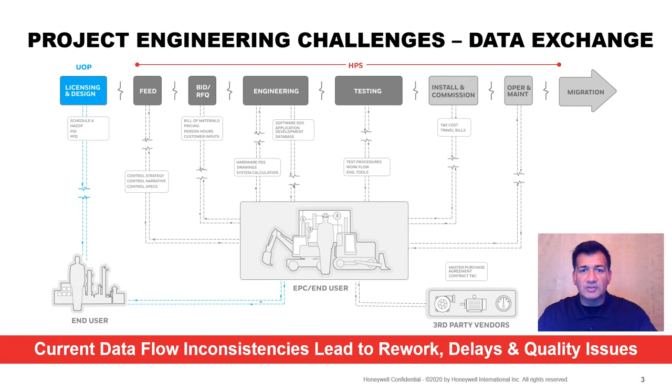Honeywell has begun to solve these current challenges by digitally transforming our project implementation processes across all project phases: front-end engineering design, implementation, and testing.

We have a cloud-based environment called the Honeywell Virtual Engineering Platform, or HVEP 4.0. This cloud hosts our project data and has our standard builds, checklists, solution packs, and tools seamlessly integrated.

This allows the same data to be used by all project stakeholders from the start to the final deliverable, which significantly improves quality and overall productivity.

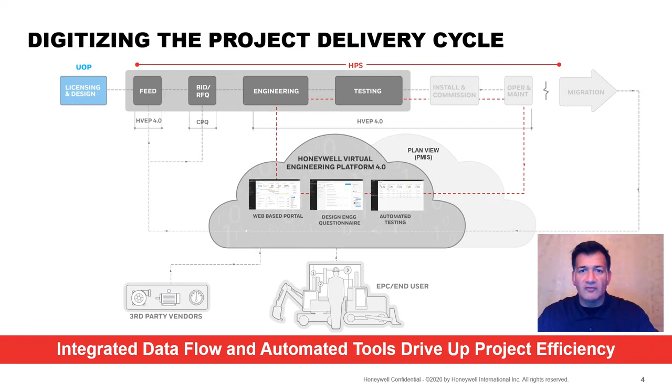The Honeywell Virtual Engineering Platform 4.0 digitizes the project engineering processes with a secure, centrally hosted cloud environment. It enables project team members to collaborate on a remote basis using cloud dashboards for transparency and a view of all the project status and deliverables.

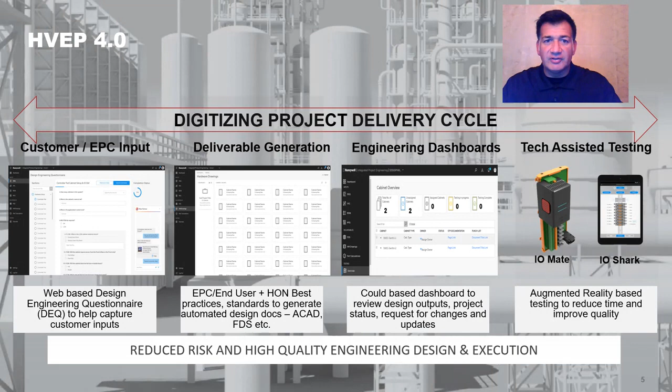The first area you want to look at is called the Design Engineering Questionnaire, which has built into it our proven designs and Honeywell best practices.

What we have done is digitized our project design checklist and questionnaire, which allows us to capture standardized inputs from multiple sources in a consistent manner. The assembly of these inputs, associated and aligned with standard build content, then allows for the deliverables, such as the functional design specification, to be generated.

These deliverables can be generated with the click of a button. I have a short video to demonstrate this.

Once we have completed a sufficient portion of the DEQ, we are then able to generate deliverables, which could be in the form of a functional design spec, hardware drawing, or test reports. What we've done is taken standard project tools, for example those used to support drawing generation.

They are connected to the project source inputs, which allows auto generation capability of our hardware drawings. I will demonstrate this with a short video.

What I'm showing now is a video that will give you a conceptual understanding of the Design Engineering Questionnaire. On the left-hand side of the main menu, you see the inputs, then the deliverables, and then the testing criteria.

This particular questionnaire is used to complete the requirements for a safety system SC cabinet design, where we've tried to maximize these standard options.

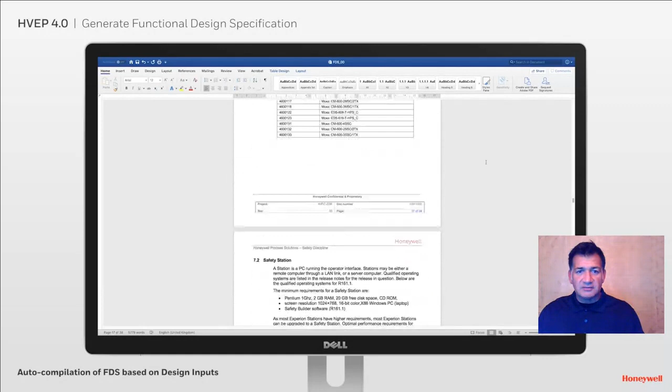That helps us maintain alignment with revisions to documents. So what you see here is our standard functional design specification for a safety system.

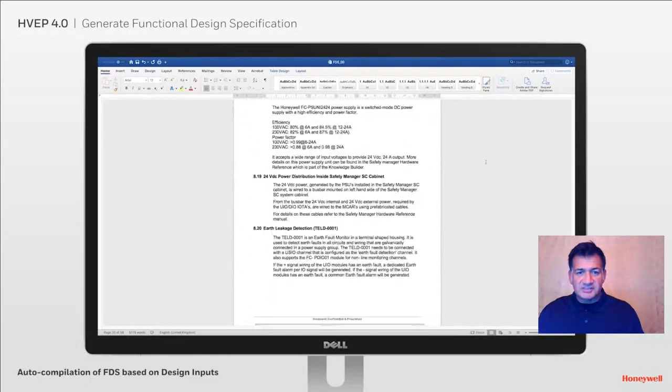The next thing we want to show is how we generate standard hardware drawings. We have another question-and-answer type tool called Total Plant Configurator. Customers would ask us to complete, or we'd ask them to provide, the number of inputs, outputs, cabinets, etc. The output of that is a PRJ file.

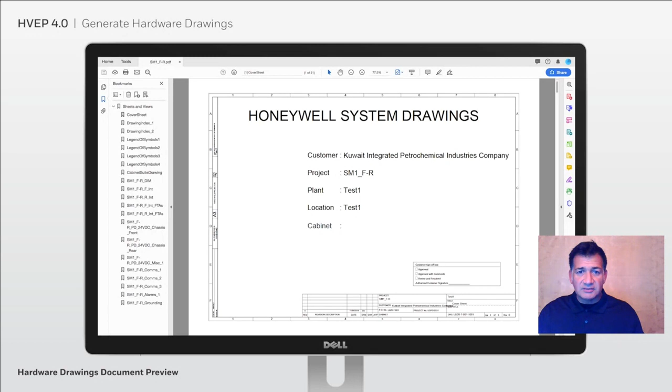What we've done here is embed our standard drawing tool, and we now hit Generate Hardware Drawings, and you see the standard drawing pack. Along with the standard DWG files, we also get a consolidated PDF. We'll open the PDF document, and what you see here is a representation for this particular drawing set, automatically generated based on another question-and-answer that defined the hardware design aspects for the control system.

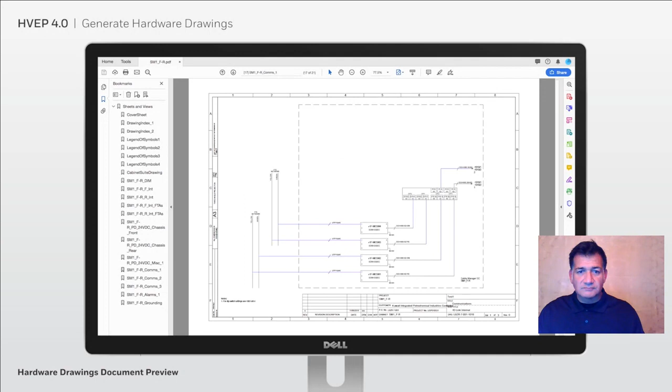The next area I want to share is how we've built engineering dashboards into the tool. This particular one is a purpose-built engineering dashboard for us to stay connected with the integrated supply chain on their status of deliverables. It's used to correlate the hardware factory supply chain to give the project team clear transparency of the cabinets when they are in design phase, build phase, or test phase.

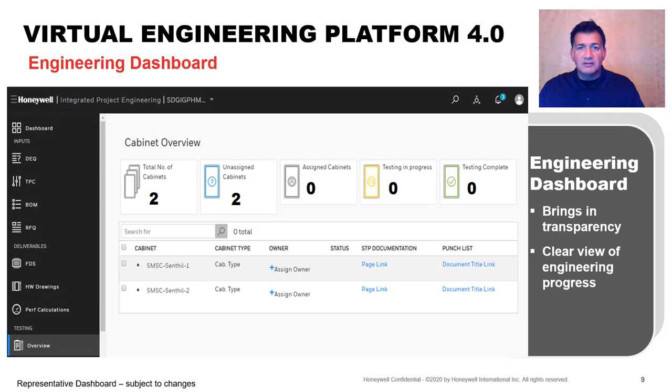All the associated deliverables, like the drawings and bill of materials for each cabinet, are connected via page links in HVEP to a particular cabinet. In the future, each cabinet will have a QR code, which will allow these drawings to be connected to them in a remote manner.

The next thing I want to share is a video of the testing. Here you can see the cabinet dashboards. We've selected the cabinet, and the application will determine the proper test procedure required for testing that particular cabinet. We've digitized the paper documents that were being used by the Honeywell factory, along with the Honeywell engineering and technician team, to go through and test this entire cabinet. So it's all digitized here.

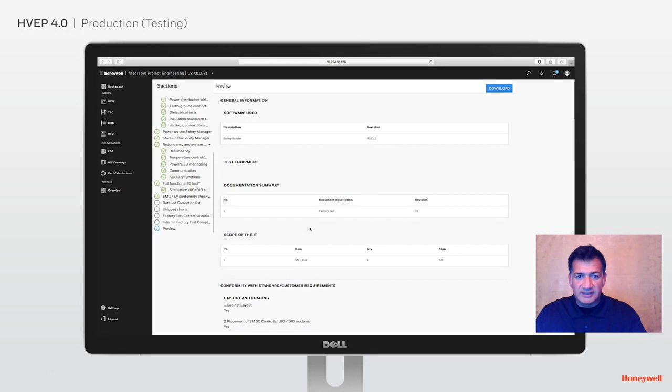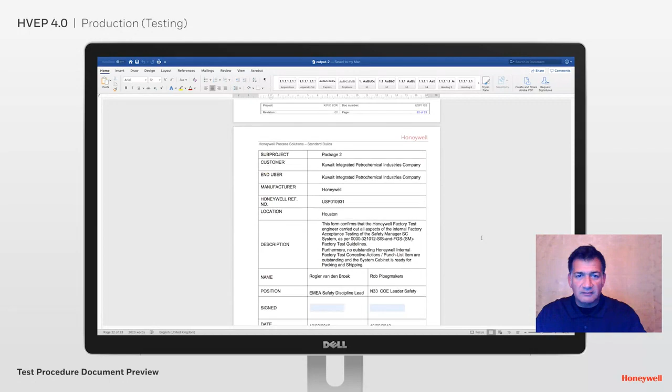It's also available on an iPad or tablet to be executed locally, and the two become synchronized in the cloud. Here you can see we're going through the test procedures, indicating pass or fail. If everything passes and there are no anomalies, we have a final document called the test procedure that then allows us to provide a quality certificate for that particular cabinet that was tested.

Next, I'd like to share our QFAT tool, Technology-Assisted Testing. It's used to assist in verifying and testing the interconnect wiring between the field side terminals in a marshalling cabinet or universal remote cabinet and the Experion IOTA. As you know, this can be quite time consuming because it typically requires two people—one at the terminals to source the signal and another at the engineering console to confirm receipt. QFAT consists of two components.

The first component is called the IOMate, a set of electronics that connects directly via a probe set custom configured to align to the terminal manufacturer specifications. Once installed on the rail, it is powered on, and they become recognized and available in the IO-Shark application, which resides on the tablet. This association is directly based on the location of the physical placement on the rail.

The IO-Shark application on the tablet has a table within it called the IO binding table. This is comprised of a subset of the wiring database and the configuration database. The wiring database creates an augmented reality version of the marshalling cabinet, including all the rails, TB headers, and terminals. The application then uses a portion of the configuration database to choose the appropriate universal I/O personality to source the signals across the wires.

Basically, once you've got everything set up, you initiate the test. It's an unmanned test. What you have as an output is a very nice digitized report that is available to be given to the customer to verify you've completed the testing.

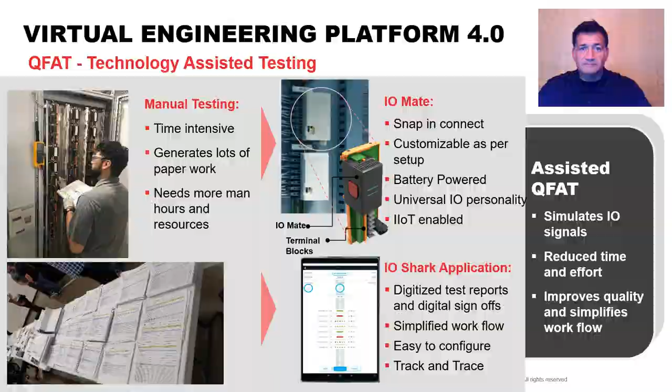In summary, using our Honeywell Virtual Engineering Platform's digitized remote collaboration environment, Honeywell, along with EPCs and end-user customers, can all work together to reduce rework and change orders, and avoid placing the integrated control and safety system site installation activities on critical path. More importantly, we can improve quality, drive standardization, and meet on-time project delivery.